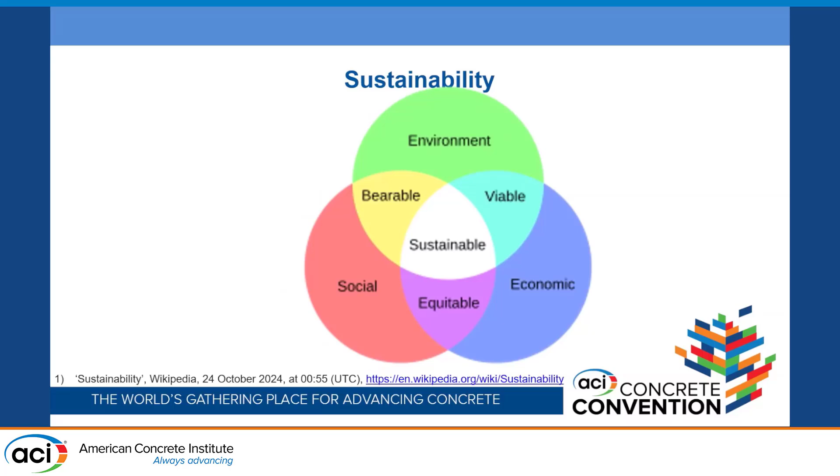Sustainability. What does it really mean? It seems that no one can agree on a single definition. However, most leaders and scholars agree that it encompasses social, economic, and environmental dimensions. After doing a little research, I found that the simplest definition, and the one I like the best, is: sustainability is a social goal for people to coexist on Earth over a long period of time. Or in other words, to meet our own needs without compromising the ability of future generations to meet their own needs. And there are so many different aspects to sustainability: renewable resources, waste reduction,

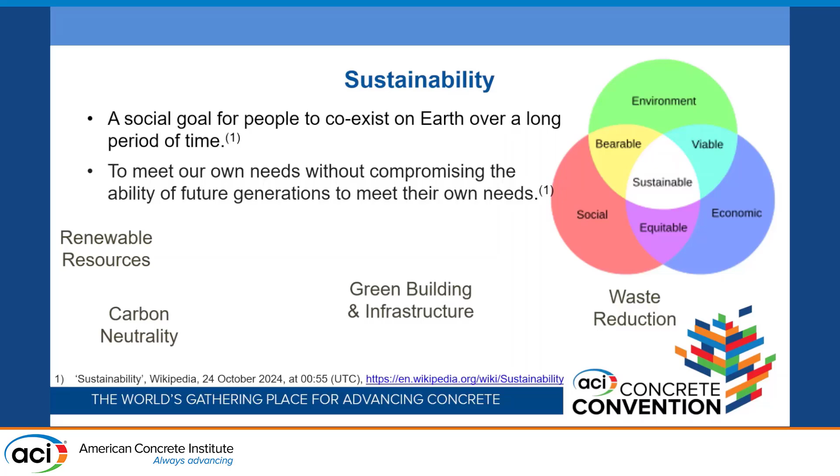carbon neutrality, green building and infrastructure, sustainable supply chain, and eco-efficiency, among many others. The aspect that I am going to focus on today is durability.

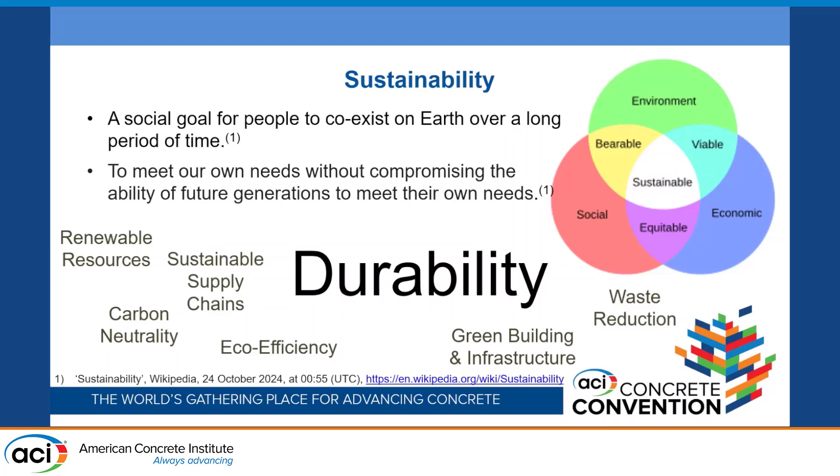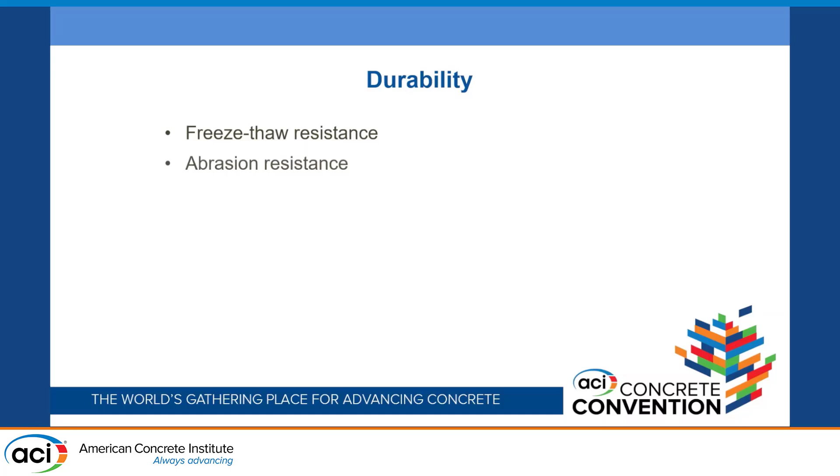In the realm of concrete, durability has classically meant freeze-thaw resistance, but today it encompasses so much more than that: abrasion resistance, flexural toughness, impact resistance, shear resistance, post-crack residual strength, and I think the most important of all, fewer cracks. Basically all of the things that make concrete perform better and last longer.

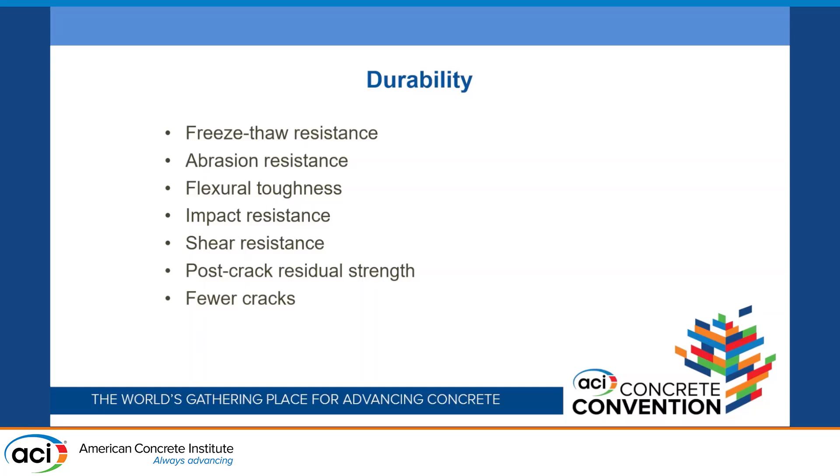ACI concrete terminology defines durability as the ability of a material to resist weathering action, chemical attack, abrasion, and other conditions of service. With this in mind, I'm going to present some fiber-reinforced concrete projects that demonstrate how fiber reinforcement plays an important role in our industry's durability and therefore sustainability goals.

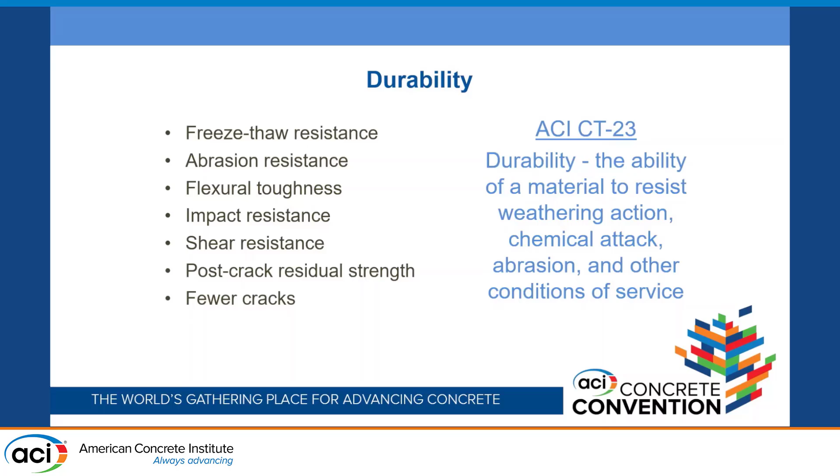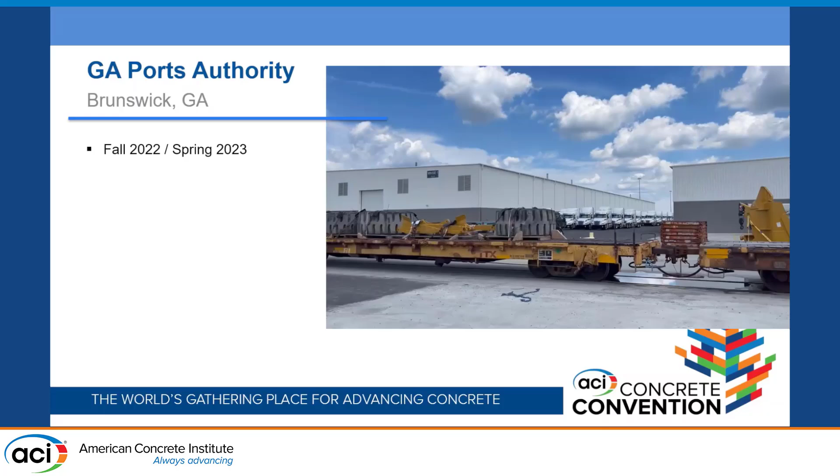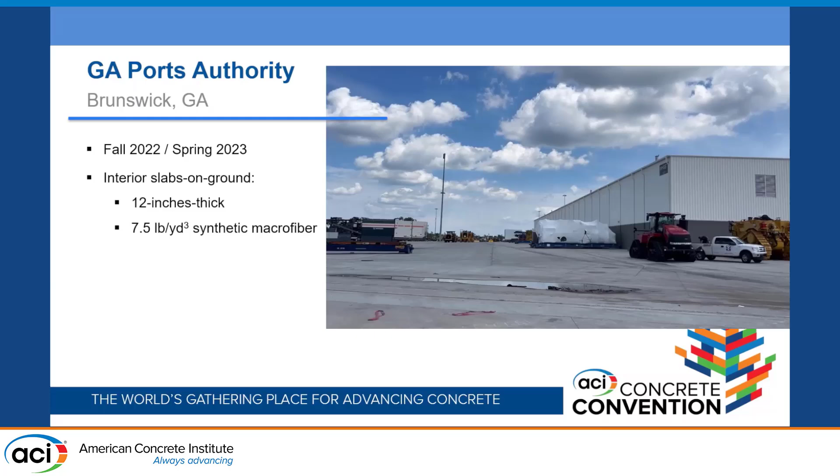While this project was placed relatively recently, the Brunswick Terminal of Georgia Ports Authority already shows how fiber reinforcement increases the durability of concrete. This project included roughly 2 million square feet of concrete for various interior slabs on ground and pavements. All interior slabs on ground are 12 inches thick and reinforced with 7.5 pounds per cubic yard of synthetic macrofiber, and all pavements are roller compacted concrete with no fiber reinforcement.

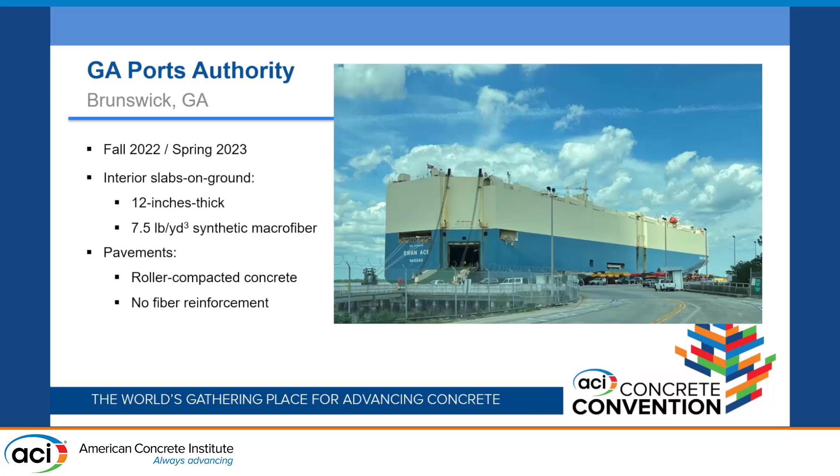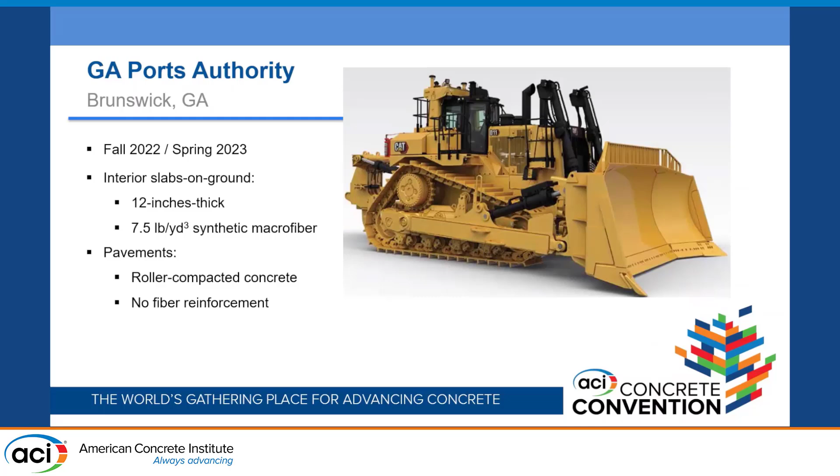Brunswick is the nation's second busiest port for import and export of roll-on, roll-off cargo, and sees a lot of heavy equipment that come through the port. This includes CAT D11 dozers, which with an operating weight of over 250,000 pounds and steel tracks, are some of the heaviest and most abusive pieces of equipment that are driven on these slabs.

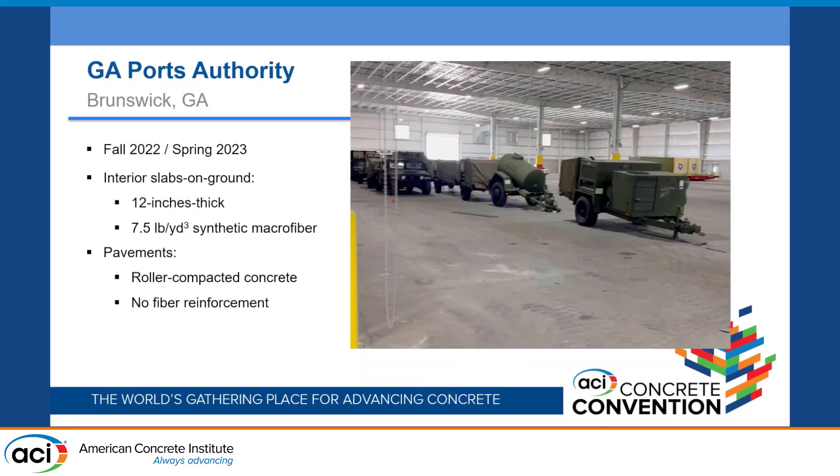The upcoming images were taken in July of this year and show comparisons between the fiber-reinforced interior slabs and the non-fiber RCC pavements, all of which have seen the exact same loads and traffic. These images are inside one of the fumigation buildings, which all cargo must go into for fumigation before being put on a ship. As you can see, the slab shows only minimal wear and almost no damage from the equipment

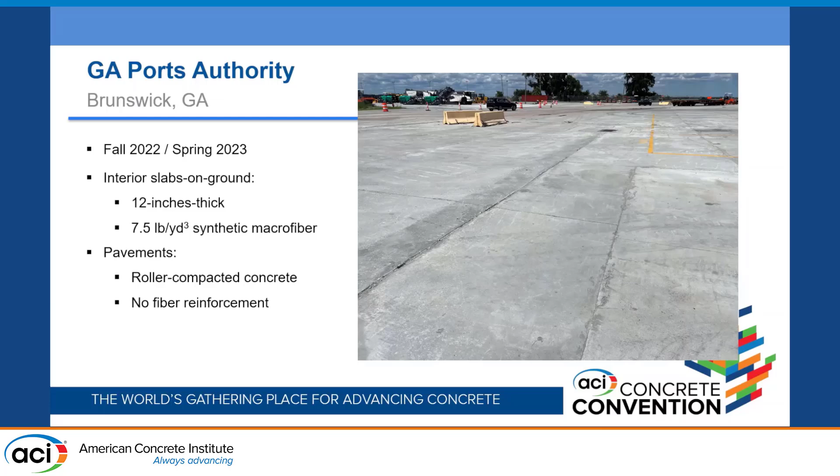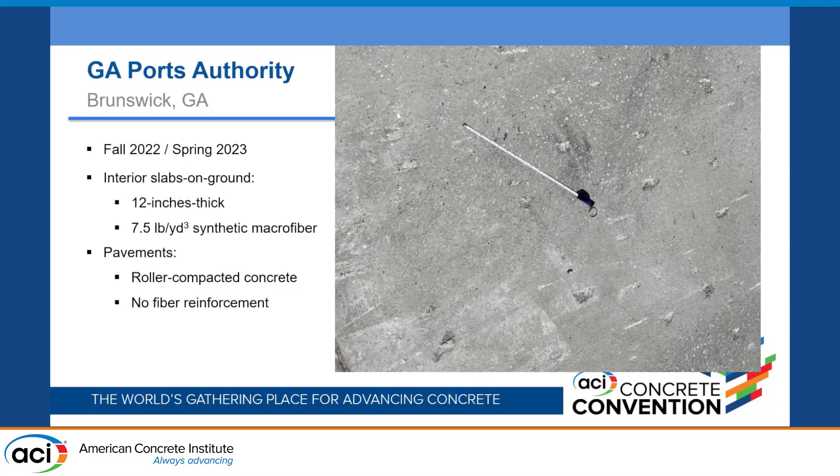that has driven over it in the 18 months since it was put into service. Compare this to the RCC pavement outside the buildings, where you can see very obvious wear and damage, including abrasion from the steel tracks of the D11 dozers, joint raveling, and pitting of the concrete surface. Time and abuse have shown that fiber reinforcement has undoubtedly increased the durability of the interior slabs compared to the RCC with no fiber.

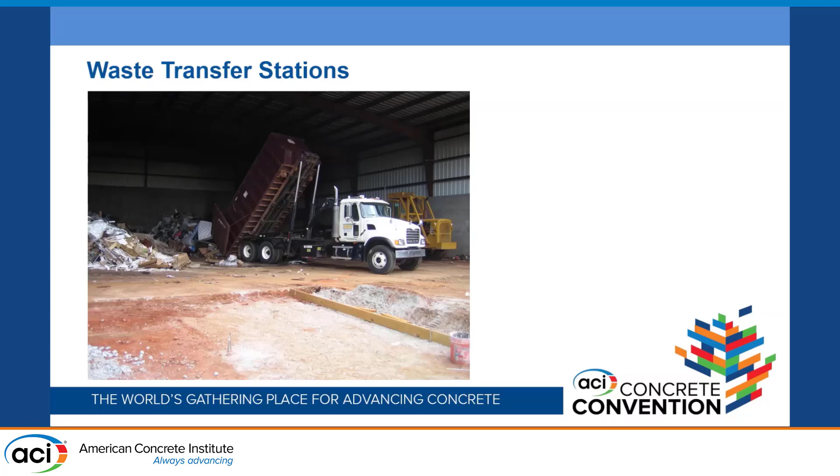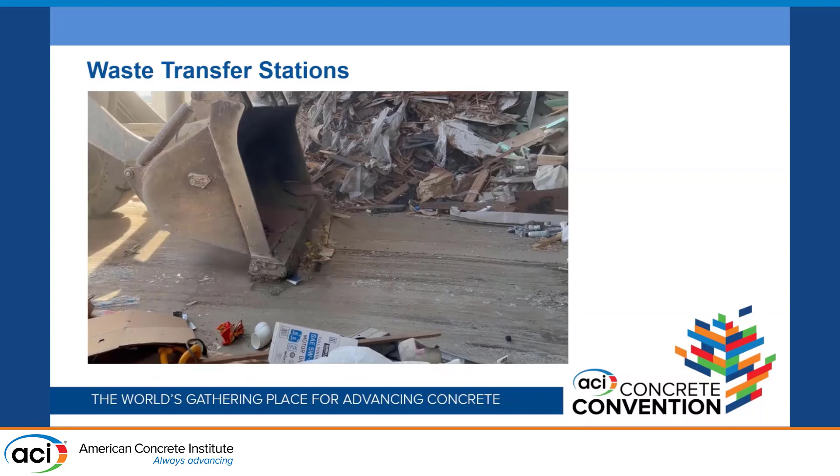Prior to arriving in landfills, waste is hauled to transfer stations and dumped or tipped onto a floor where it is consolidated and reloaded into larger trucks. These tipping slabs are known to be some of the most challenging slabs in the industry, subject to extremely harsh conditions, which includes aggressive chemicals, impact loads, abrasive elements, and damage from the constant scraping of heavy processing equipment.

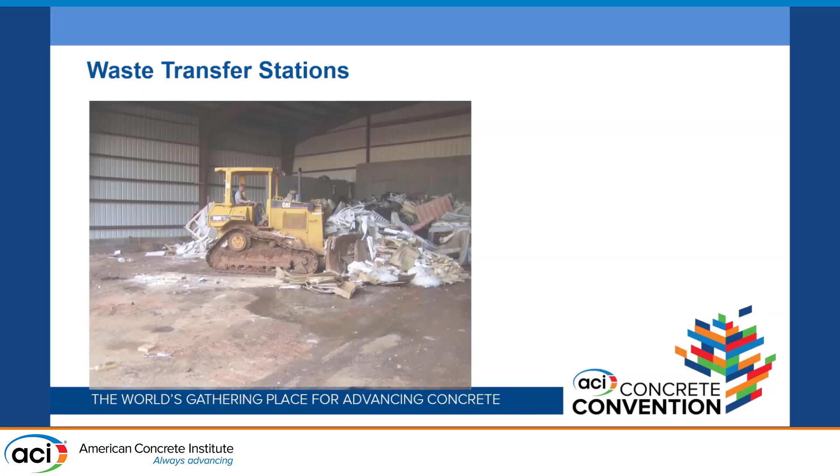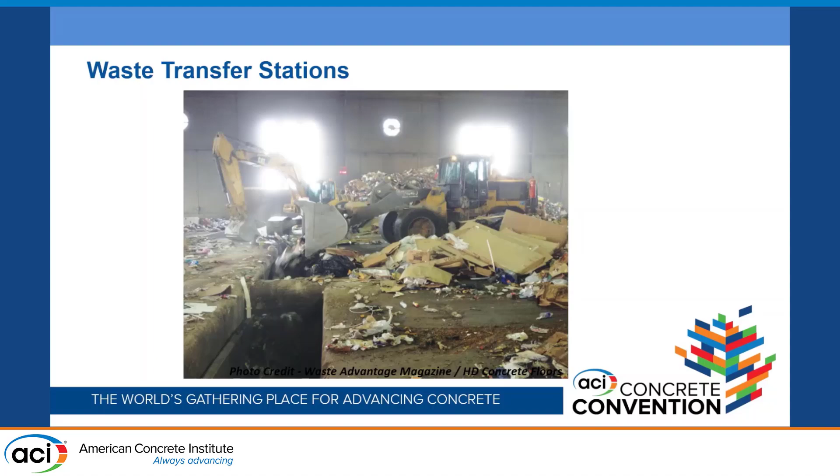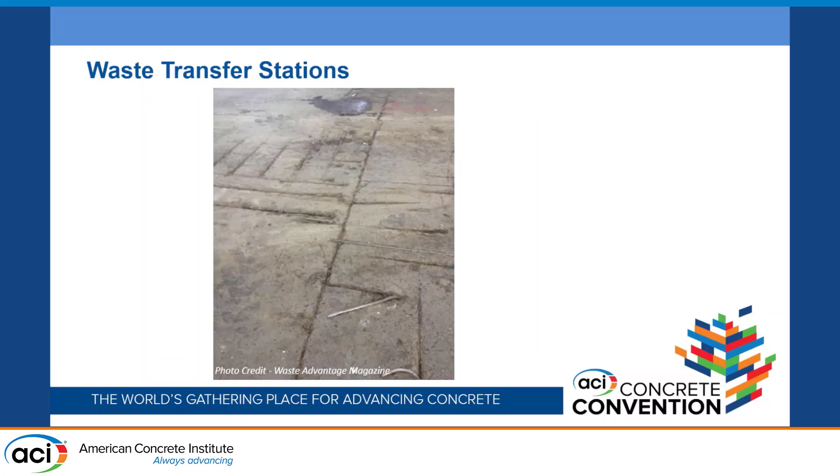These harsh conditions accelerate the inevitable deterioration of the slab, and depending on the types and volume of waste handled at a facility and on how well or often the slab is cleaned and maintained, a tipping slab can lose anywhere from 1/4 to 2 inches of thickness per year. Typical damage seen on these slabs are pebbled surfaces with exposed aggregates, holes and uneven joints, and exposed and deteriorated rebar reinforcement, which is not only dangerous, but also damaging to processing equipment.

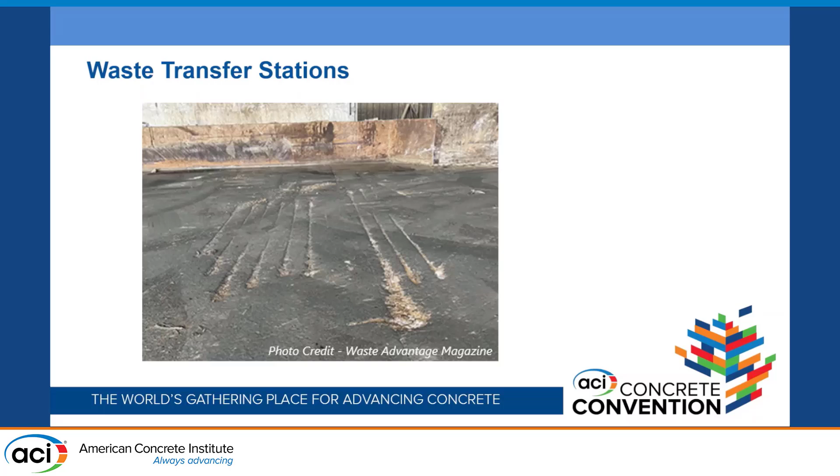Eventually, the damage dictates that the slab must be replaced. Designing the slab with fiber reinforcement instead of rebar is one alternative to attain a more durable slab and extend its life. In 2005, the tipping slab at one of the transfer stations for Attaway Waste Services in Georgia had severe cracking and joint issues and needed repair to extend its life.

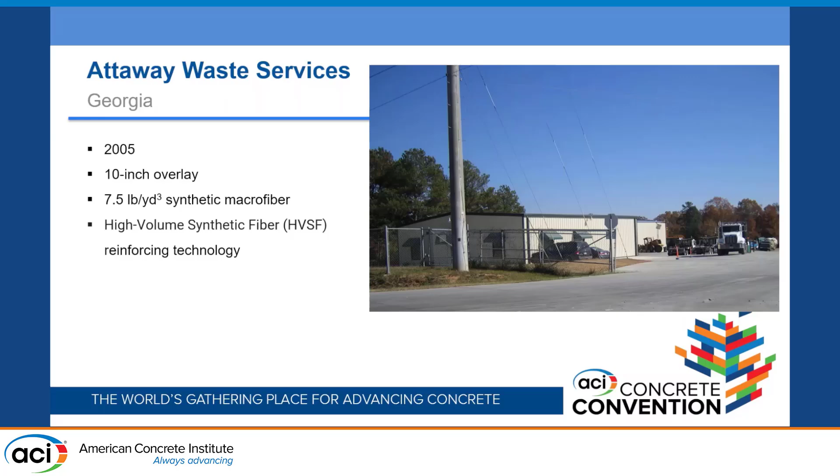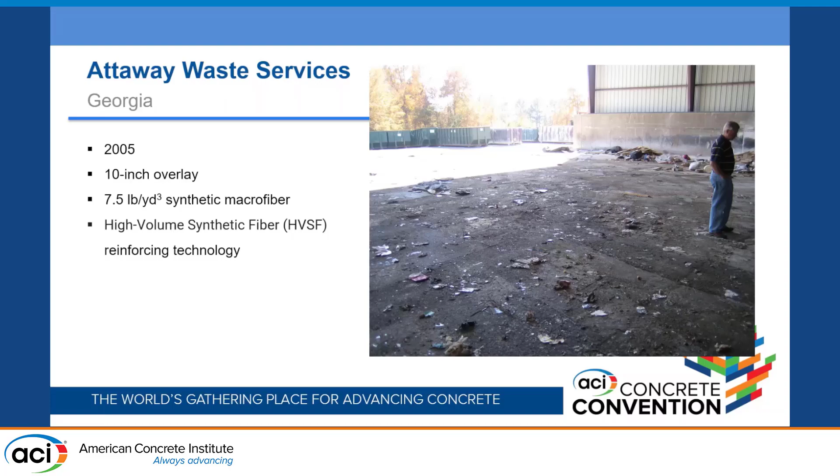Conventional design and steel reinforcement had not solved the issues they were experiencing, so project specifiers decided to use high-volume synthetic fiber reinforcement, which at the time was fairly new technology, instead of rebar reinforcement. The 7.5 pounds per cubic yard dosage of synthetic macrofiber and a 10-inch overlay allowed them to eliminate all saw-cut joints, which provided further durability benefits to the slab.

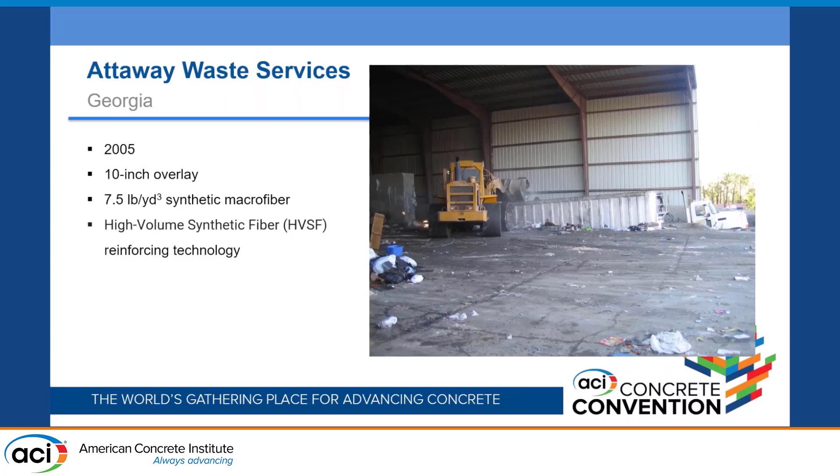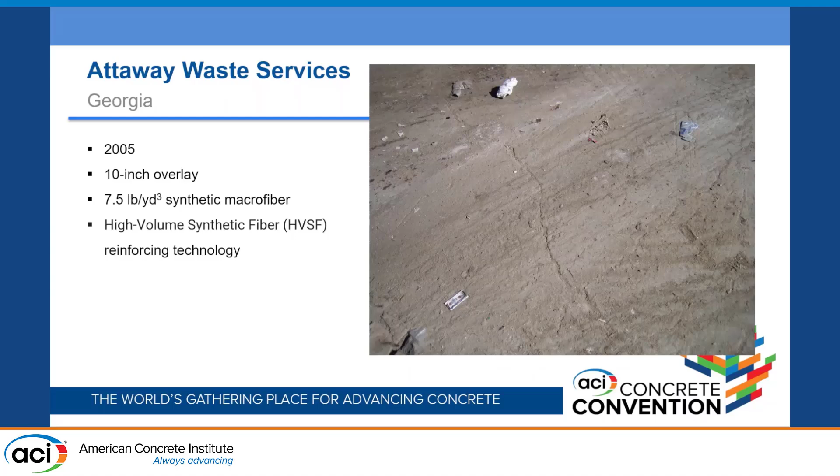The topping slab has developed some reflective cracking, but those cracks have remained tight and caused no issues. With the success of this project, Attaway has used the same overlay design to revitalize the tipping slabs at several other transfer stations, as well as for several new facilities.

In 2012, when Dane County in Wisconsin added a new transfer station to their waste facility, they were looking for options to increase the durability and toughness of the concrete for its tipping slab. Project engineers decided to add silica fume to the concrete mix and use trap rock aggregate to increase the concrete's density and abrasion resistance, as well as to reduce its permeability and shrinkage.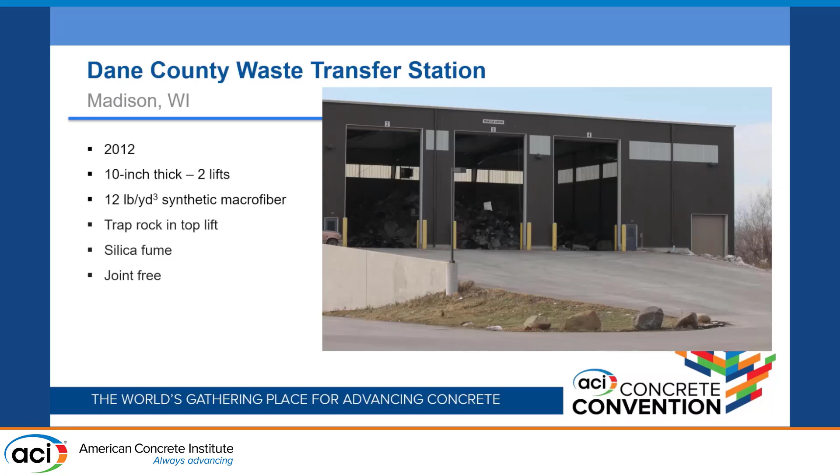They also wanted to use fiber reinforcement instead of rebar to both increase the concrete's durability and avoid the eventual issues with exposed rebar. After conferring with their fiber supplier, they decided to use a relatively high dosage of 12 pounds per cubic yard, which allowed them to have a joint-free slab.

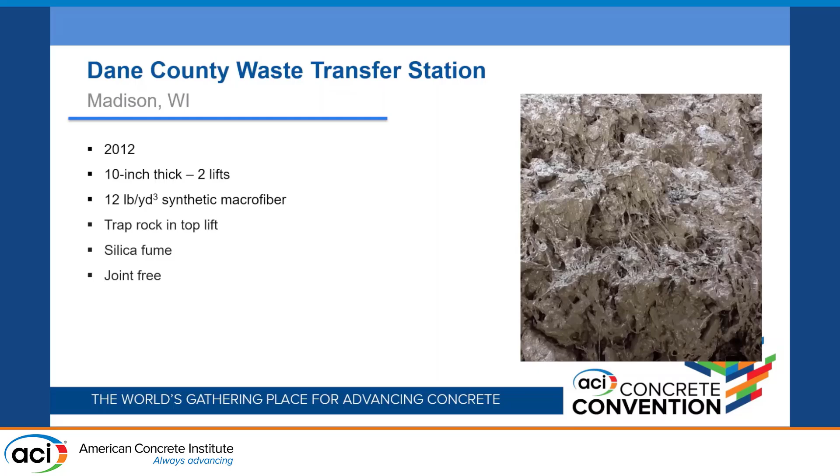To reduce the added cost of the trap rock, they decided to pour the 10-inch thick slab in 2 lifts. In the bottom layer, they used local aggregate, and in the top layer, they used the more expensive but better performing trap rock. They maintained the same dosage of silica fume and fiber dosage in both layers to prevent any shrinkage differential between the 2 layers.

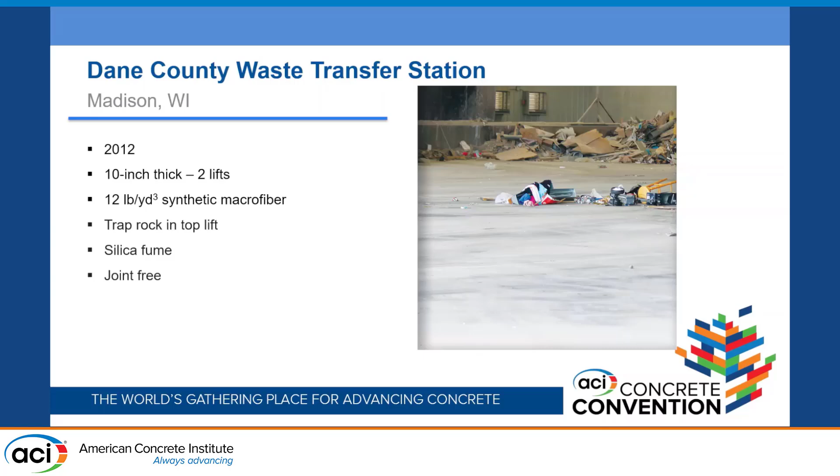This site has been surveyed several times over the last 12 years, each survey revealing no cracks and no issues with the tipping slab. The most recent survey was done only 5 days ago, and these photos were taken during that visit, and they pay testament to the durability and sustainability level that has been achieved.

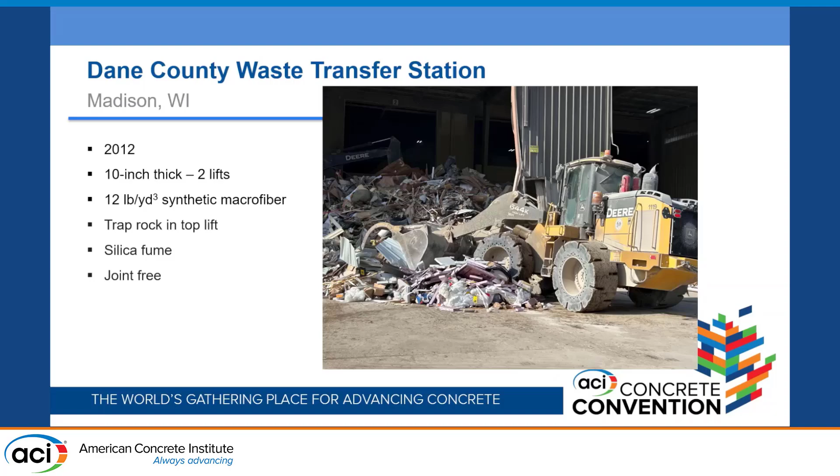As you can see, the building was pretty full, which speaks to the amount of waste that comes through the facility, but also didn't leave much of the floor exposed. The floor that was clear for inspection had no cracks, and the workers attested that they have seen no cracks in the slab.

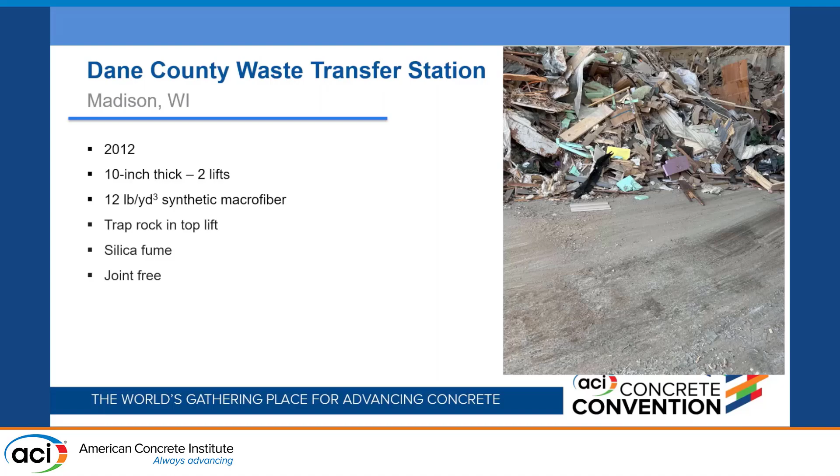You can see how the surface paste has been removed by the constant scraping of the equipment, and that has exposed the trap rock. The trap rock is doing its job of providing a hard abrasive resistant surface, and the fibers are doing their job of distributing stresses in the slab and controlling cracks at the micro level.

To have a heavily used tipping slab last 12 years with no signs of needing replacement anytime soon is quite the success story.

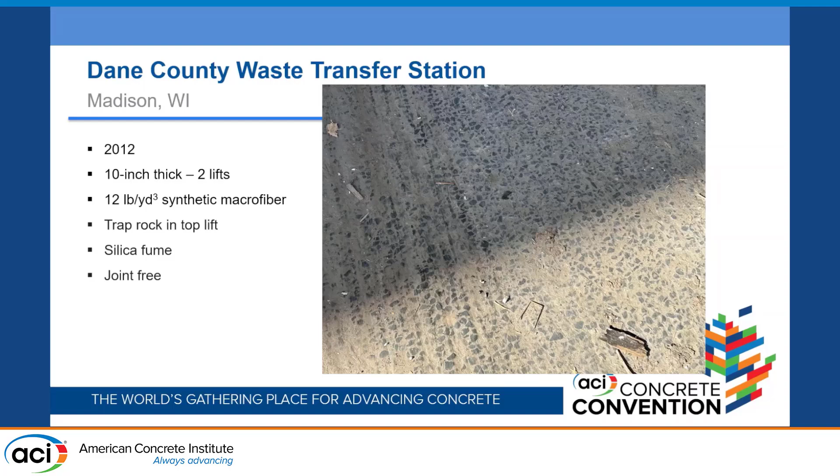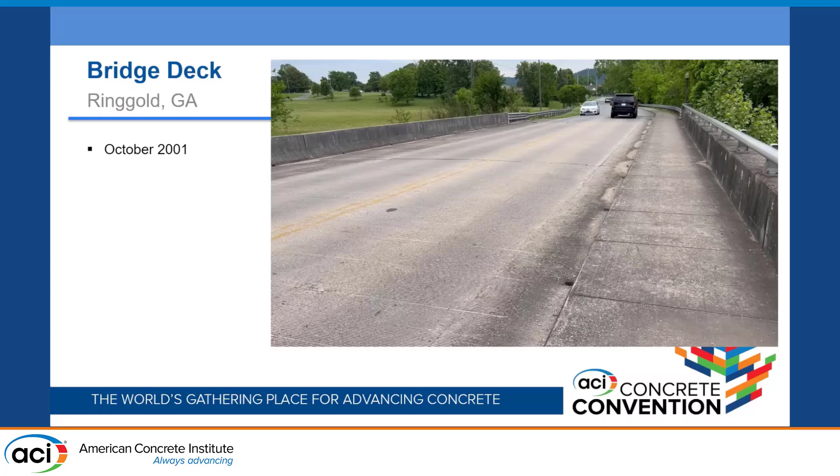This bridge deck in Ringgold, Georgia, was originally built in the 1950s and had been resurfaced in 1997. But by 2001, the resurfacing had already deteriorated to the point of needing repair. Georgia DOT looked to using fiber reinforcement as an easy-to-use and cost-effective method to add a high level of crack control and long-term durability. 4 pounds per cubic yard of macrosynthetic fiber were used in the 3.5-inch overlay.

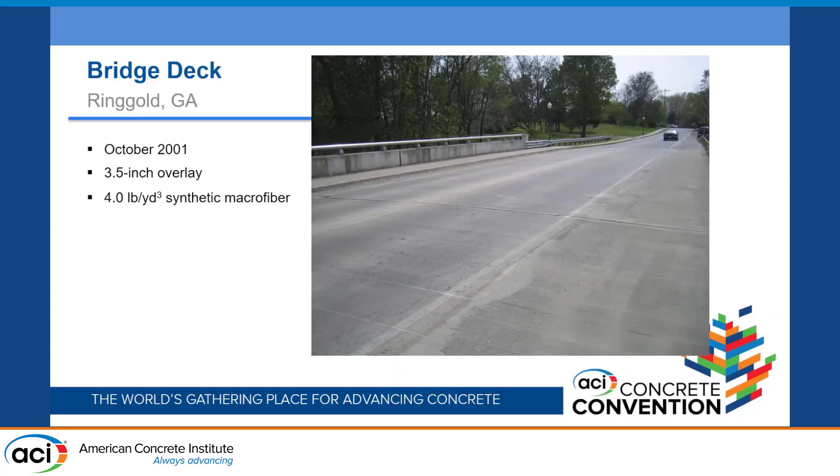The bridge deck has been surveyed several times since its initial construction in 2001, and this photo, taken at 6 years of age, shows a crack that had formed from the corner of one of the keyways with the approach slab to the edge of the overlay. As you can see, the crack is being held very tight with no raveling.

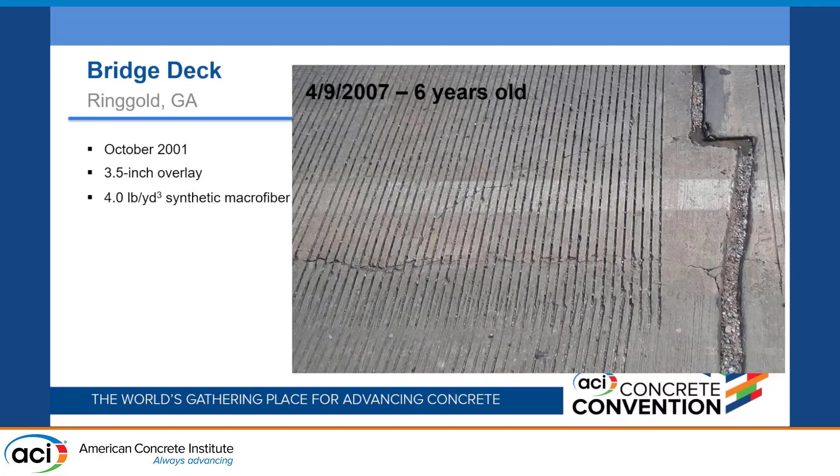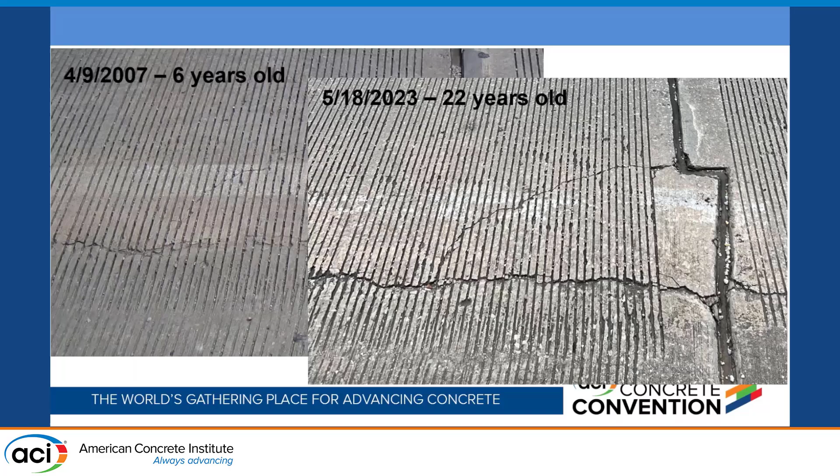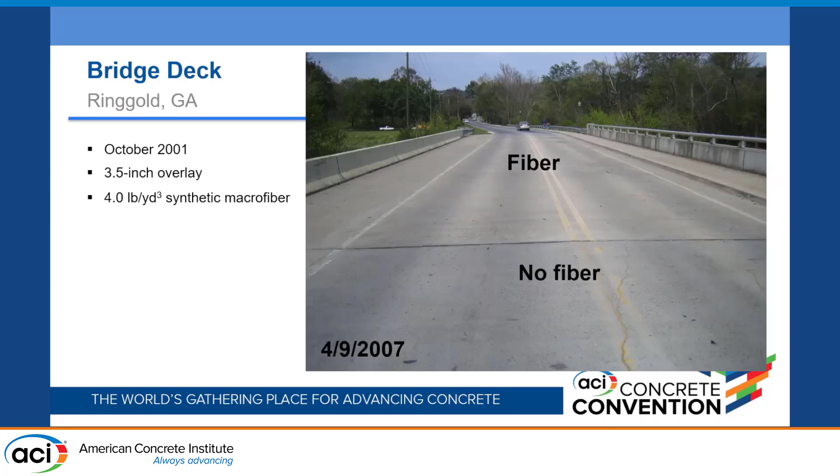Compare this to 16 years later, when the bridge is 22 years old, and you can see that this same crack is still being held tightly together with almost no raveling. As early as 2007, you can already see condition differences between the non-fiber slabs and the fiber overlay. While there is some reflective cracking in several locations, all cracks are being held tightly together with no appreciable raveling. At 23 years old, this fiber reinforced overlay is on track to far exceed its design life.

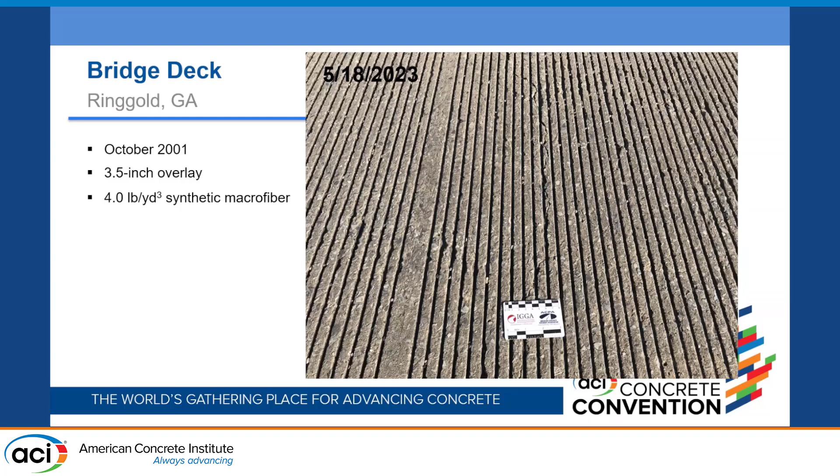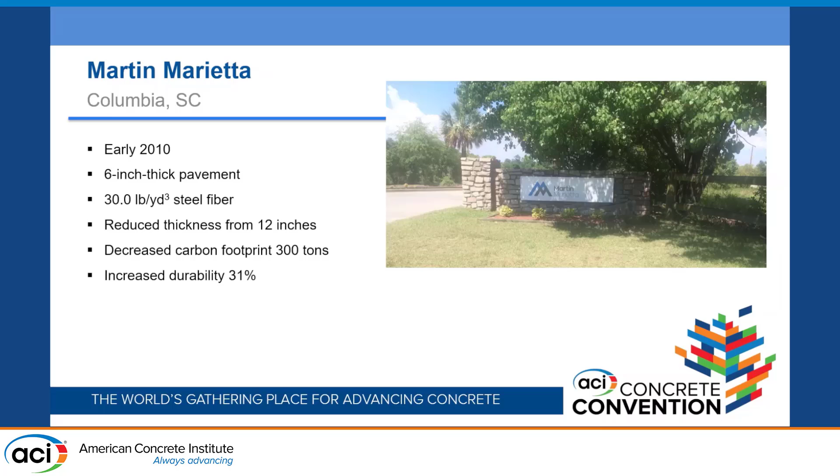In early 2010, Martin Marietta Aggregates was replacing pavement at their Columbia, South Carolina facility, which historically experienced a high rate of pavement failures. They were looking for a reinforcement technology that could help concrete withstand high-frequency traffic and heavy loading without cracking or failure. Traffic at this facility averaged 250,000 ESALs per year, at times reaching 300,000, much of it from 5-axle aggregate hauling trucks at 3.9 ESALs per pass.

In addition, the area had poor soils with a K value of 100 PCI at best. Their previous pavements had been up to 12 inches thick and would typically fail within 2 to 3 years of installation. The owners and concrete contractor worked with a fiber manufacturer to design a pavement that would achieve the owner's requirement of lasting at least 5 years.

Their final design included a dosage of 30 pounds per cubic yard of steel fiber, which not only added the toughness and durability they were looking for, but also allowed them to reduce the pavement thickness by 50%.

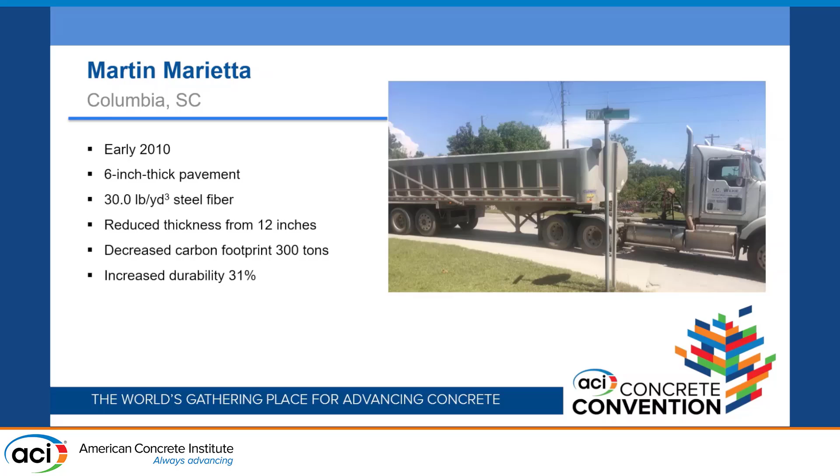When surveyed at the 5-year mark, after roughly 1.7 million ESALs, the pavement was found to be performing perfectly. No visible cracks, the joints have remained tight with no raveling, and although the paste layer has worn away, there are no steel fibers sticking up. This pavement was checked again at 8 years of age and found to be still performing well, far exceeding all expectations.

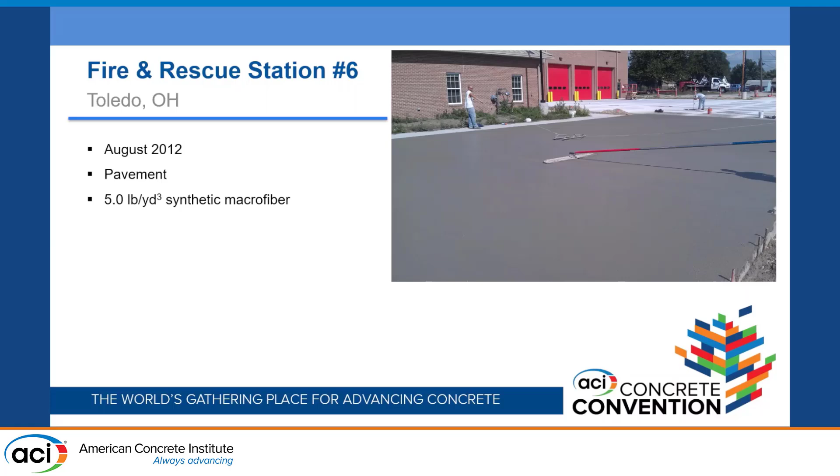After placement, they encountered cracking issues with a portion of the slab which had to be torn out and replaced. The specifiers and owners discussed alternatives to avoid a repeat of the first pour. After consulting with a fiber supplier, they decided to use synthetic macrofiber reinforcement at a dosage of 5 pounds per cubic yard instead of the mesh. They understood that fiber reinforcement would add a level of toughness and durability to the concrete that the mesh could not.

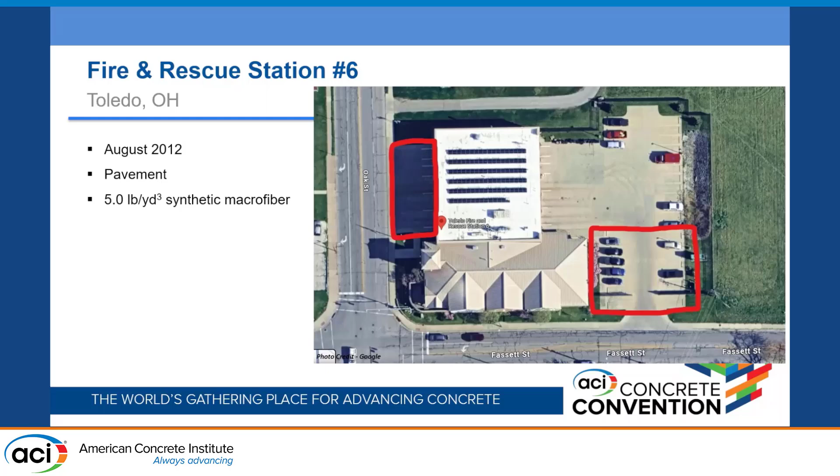This image shows the locations of the fiber reinforced pavement sections, outlined in red. They are the front drive and entrance of the fire station, and half of the rear entrance and parking area. These next photos were taken only a few weeks ago and show side-by-side comparisons of the fiber and non-fiber sections. In general, they are performing equally well.

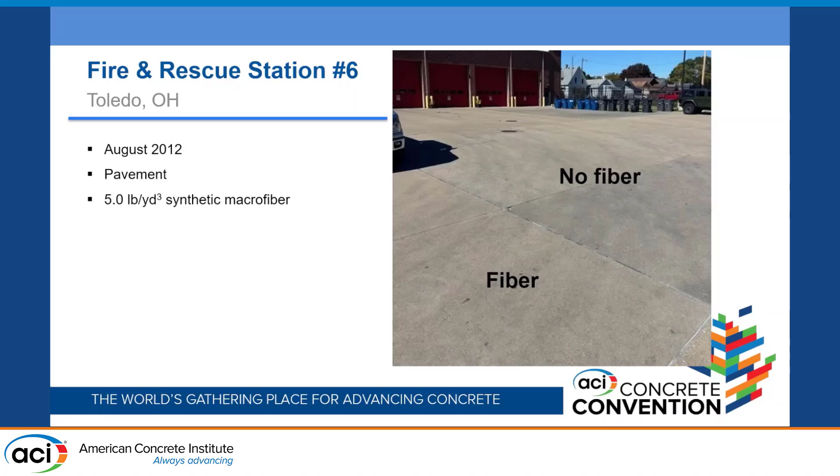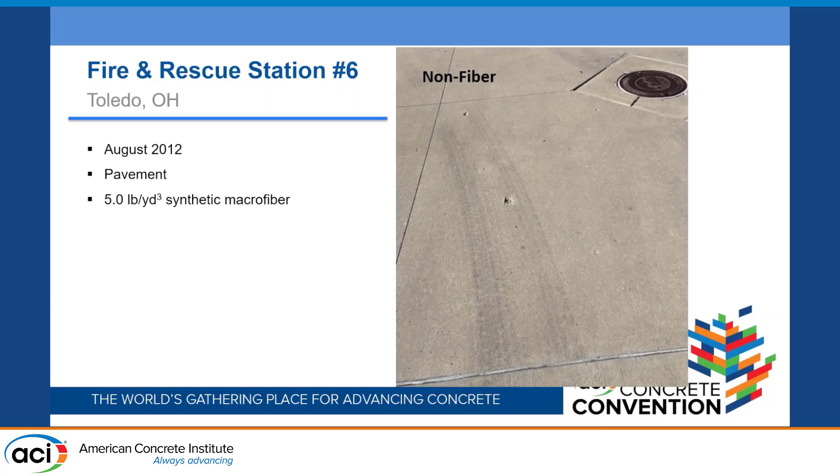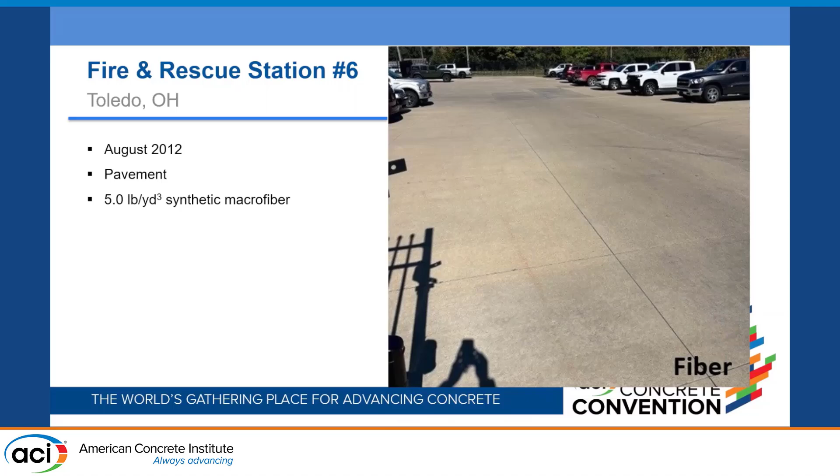However, there are a few points I'd like to make. Much of the original pavement with the mesh is experiencing a considerable amount of pop-outs, which you can see in these photos, compared to the fiber reinforced sections, which have one single notable pop-out. Even if we attribute the pop-outs to porous aggregates, the mix used in the FRC sections had aggregates from the same source, which would create the same issue.

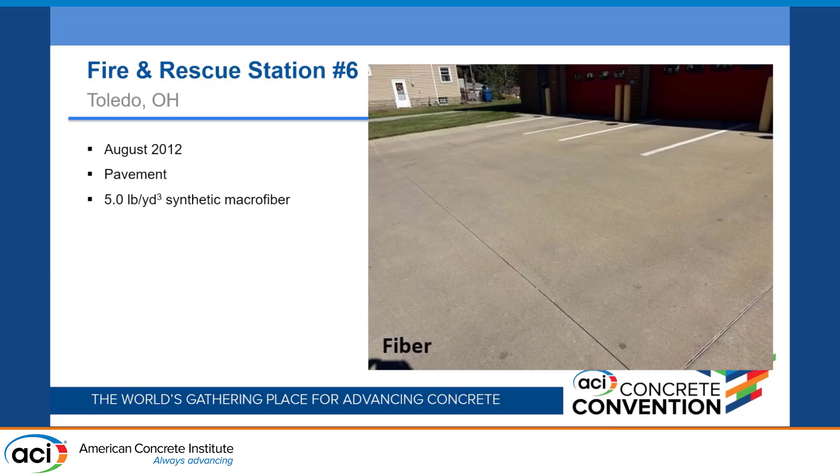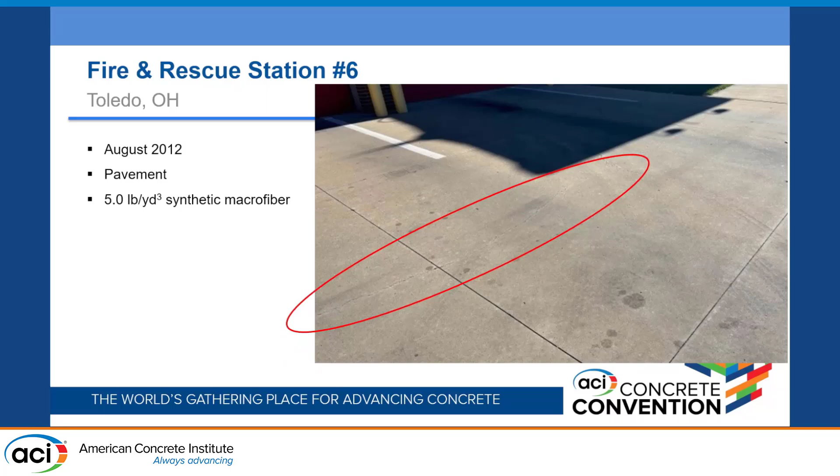Therefore, we can conclude that the fibers are reducing the permeability of the slabs and holding everything together despite the aggregate issue. Finally, the slabs at the front drive, which are fiber reinforced, developed a single crack which crosses from one panel across the joint through the other panel and ends at a construction joint. This crack could be attributed to saw cutting performed a little too late or not at the correct depth, to improper soil compaction, to drying shrinkage, or to temperature changes, but it likely occurred shortly after pouring.

As you can see, that crack has been held very tight for what could be as long as 12 years.

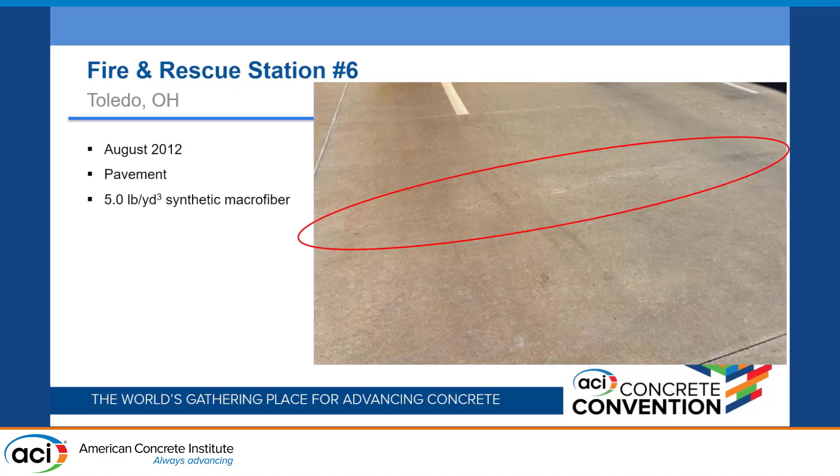Again, the fibers are performing as they should.

A great example of small commercial applications benefiting from the sustainability and durability of fiber reinforced concrete is the Sparkles roller rink in Marietta, Georgia. In 2004, this family-owned roller skating rink needed a repair solution for their cracked and deteriorated floor. The contractor suggested using synthetic macrofiber due to his previous positive experiences with the three-dimensional reinforcement, knowing it was the best opportunity to achieve a joint and crack-free surface on this very large floor.

A 4-inch thick topping slab with a dosage of 7.5 pounds per cubic yard was placed, and you can see that it's decorative. The floor is joint-free and approximately 167 feet by 81 feet. The contractor had no issues achieving a super flat finish. In fact, this repair project received the Award of Excellence in the Restoration category in 2004 from the Georgia chapter

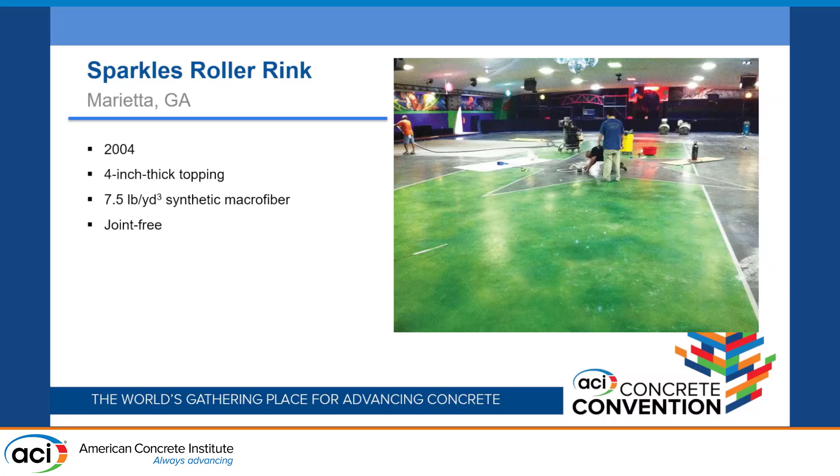of ACI. The fiber-reinforced concrete provides a more sustainable and durable floor with less maintenance than other flooring types, such as wood or epoxy. Maintenance of the FRC floor consists only of sweeping and wet mopping, whereas other flooring types also require refinishing every 5 to 10 years.

About 10 years ago, this area of Georgia experienced some pretty severe flooding. About 2 feet of water flooded the skating rink. Aside from cleaning and drying the building and replacing some carpeting, they did not have to do anything special to get the floor back in shape for skating. If this had been any other type of flooring, it would have required extensive repairs and maybe even a full replacement, which would have meant considerable downtime for the business.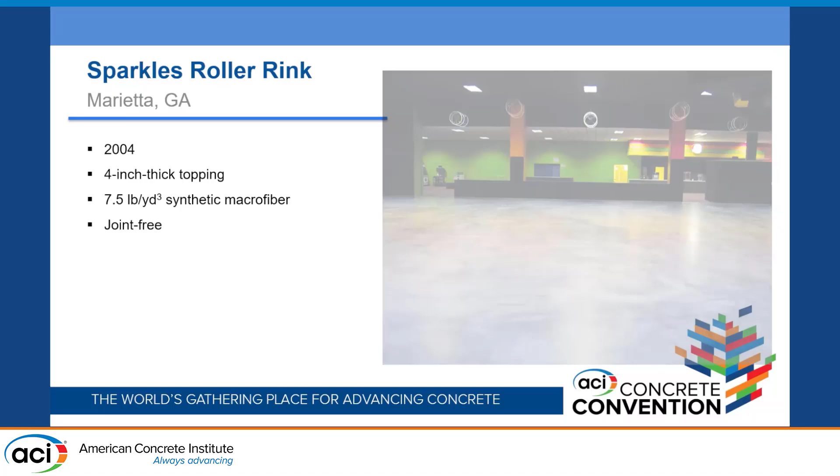A visit to the rink in 2022 to survey the floor revealed that after 18 years, there are no cracks or other signs of wear or deterioration, and the owner reported that the floor is holding up very well.

This final project is one that absolutely deserves some recognition and is one that might be familiar to some of you. While some aspects of this concrete driveway might fall outside industry recommendations, it does demonstrate the possibilities of what is achievable with fiber reinforcement when everything is done correctly.

This driveway was placed in September of 2011 on a compacted gravel base with a heavy mil poly slip sheet directly under the concrete to reduce the sub-base coefficient of friction. A conventional, commonly available mix design with half-inch limestone chip aggregate, relatively low cement content to minimize shrinkage potential, and relatively low water cement ratio was used. The only admixture was a low-dose superplasticizer.

A synthetic macrofiber dosage of 7.5 pounds per cubic yard was added and mixed on site. The driveway is 5 inches thick with a very uniform cross-section and is 10 feet wide, except for flared sections where it meets the road and where it attaches to a turnaround at the top of the driveway. The total length of the driveway is 210 feet, which is joint-free except for a single construction joint at 25 feet and a single tooled joint in the remaining 185 feet, with the longest joint-free section being 155 feet.

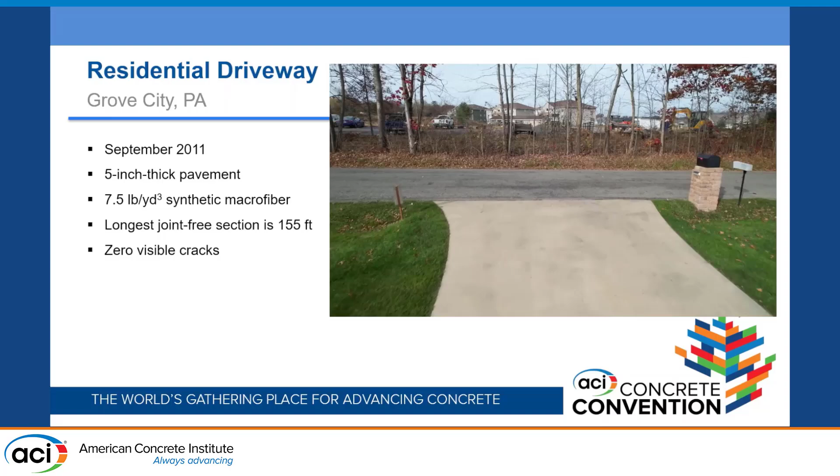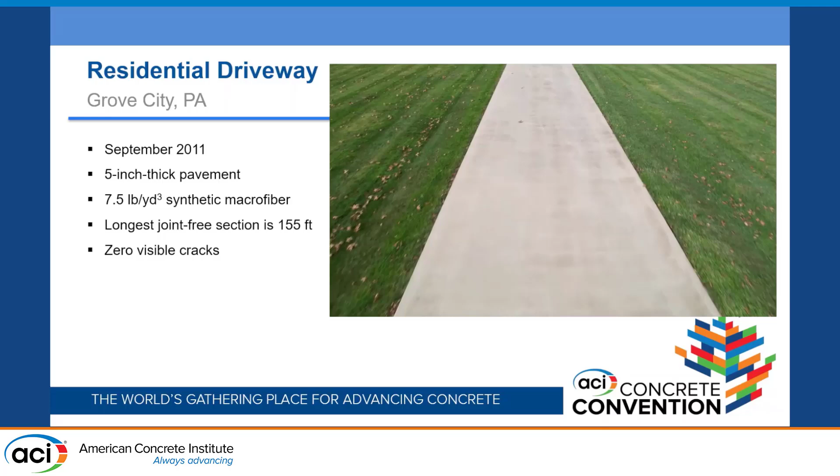The surface received a light broom finish in one direction only and a spray-on surface sealer. Traffic load has primarily been residential car and delivery vans. However, a recent construction project on the property brought aggregate tandems and loaded ready-mix trucks on the driveway as well. To date, there are 0 visible cracks in the driveway. The construction joint does open and close seasonally, and the tooled joint in the 185-foot section has activated but not opened. This driveway has served and will continue to serve this owner well for many years to come.

In summary, while fiber reinforcement may not be the silver bullet that this industry needs to achieve durability and sustainability goals, it certainly is one of the tools that should be implemented. These projects are indicative of the added durability and life extension possible with the use of fiber reinforcement. We can see that even though fiber reinforced concrete slabs actually do crack, the 3-dimensional reinforcement keeps these cracks tight and the concrete serviceable. Thank you very much.